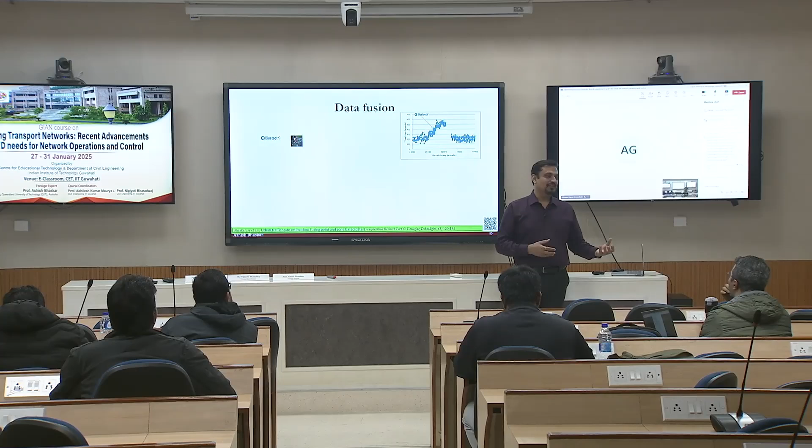So you can easily predict that during these time periods of the year, I have high demand, high volume going between cities. The correlation will be much higher with respect to the type of day, school holidays, public holidays, any function or activities, traffic will be that way. But given the flow value of a specific corridor or the traffic for a specific corridor, and you have a historical database, you can easily make a forecast of what will happen.

But traffic is quite repetitive. Human behavior is quite repetitive in that sense. To a certain extent, you can forecast it. It is expected that this time of the day, this time of the year, I will have high demand because of XYZ activities.

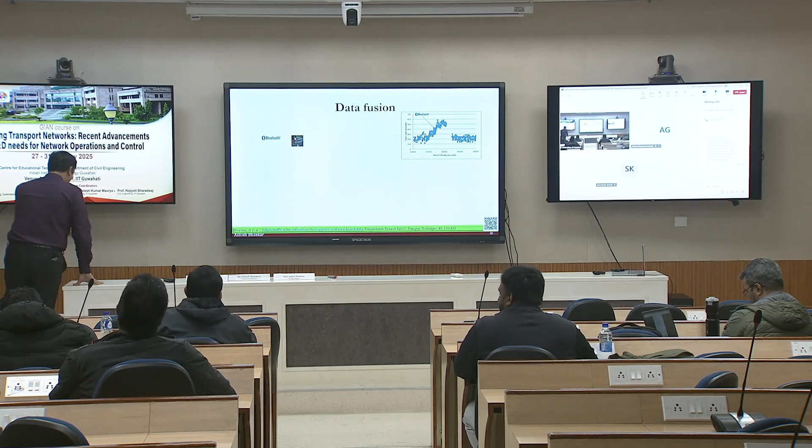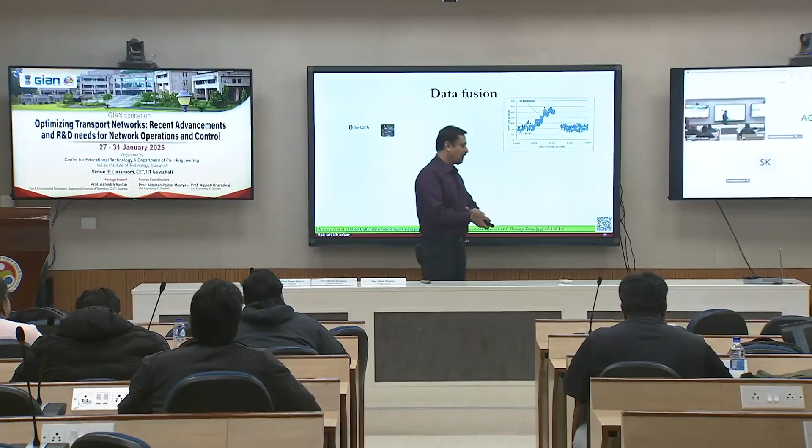In the last lecture, we were talking about Bluetooth loops. We have talked about vehicle trajectories also, and somebody asked a question: if we have data from all these sources, can you fuse them? Can you actually bring them together to have a better understanding?

Like for example, loops—we know that loops can provide us the traffic volume, the flow. Loop is one of the important sources of data which tells you how much traffic is on that road in terms of the number of vehicles.

Bluetooth can give you travel time. It can tell you how much is the travel time from A to B, but from a sample only—it will not tell you how many vehicles were there. It can give you, let's say, a sample from 5%, 10%, but you don't know what that percentage is. But loops are going to give you the volume.

But both of them alone cannot give you density. Loop can give you an estimate of the density quite well on the motorways—given that you have a speed and a flow, you can get a density estimate.

But on the arterials where you have signalized intersections, traffic is quite different. Traffic has to stop at the intersection, queues form, and the traffic is coming from all the sources. The loop is only just one focus, depending on where you have installed it—it can be a stop line, it can be upstream, it can be an advanced detector, anywhere. You only have that information, and you cannot just correlate it straight away to the density.

So we can fuse them together. We can fuse these two sources of information to get some density estimate, and also we can fuse them together to fill the gaps. In fact, we discussed that there are instances when the sample size is not strong enough for you to have confidence in your average travel time estimation from the Bluetooth.

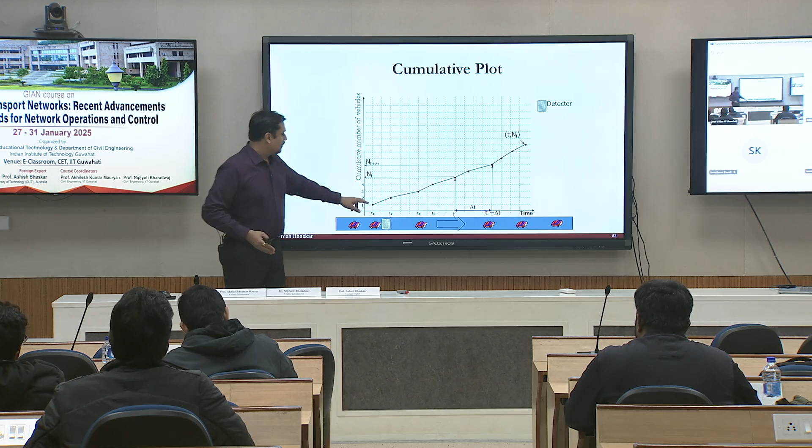So you can get the cumulative plots, right? And you know that loops are counters; they are basically counting the vehicles. You can get the cumulative plot from the loops. Here I've used individual vehicles, like pulse-type information, but what you generally extract from loops is in terms of an aggregation time interval. It might be a 20-second aggregated value or a 1-minute aggregated value. So you might say in 1 minute you have 30 vehicles arrived. So it will go from 1 to 30 in just 1 minute, right?

Now imagine you have loops at two locations, A and B. The traffic is flowing like this, downstream and upstream. At upstream, you can have an upstream counter. We call it the upstream cumulative plot, U(t) as a function. Downstream, you have another cumulative plot. We call it D(t). Imagine that the road was empty in the beginning. Then, at time t, what does this difference tell you? At any given time, what does the vertical distance between the two plots represent?

Sorry? Sorry? But then let's say there's only one lane. So you have a plot here, you have a plot there. Hmm. Yeah.

No, because imagine it like this. Until time t at upstream, this is the number of vehicles you have observed. Let's say this is 500, for example. Then at the same time t, maybe you have observed 400 vehicles at downstream. So what does this gap tell you? Density, or the number of vehicles: because 500 have entered and 400 have left, the gap is 100, so 100 must be somewhere between here and there. It is the number of vehicles between these two locations.

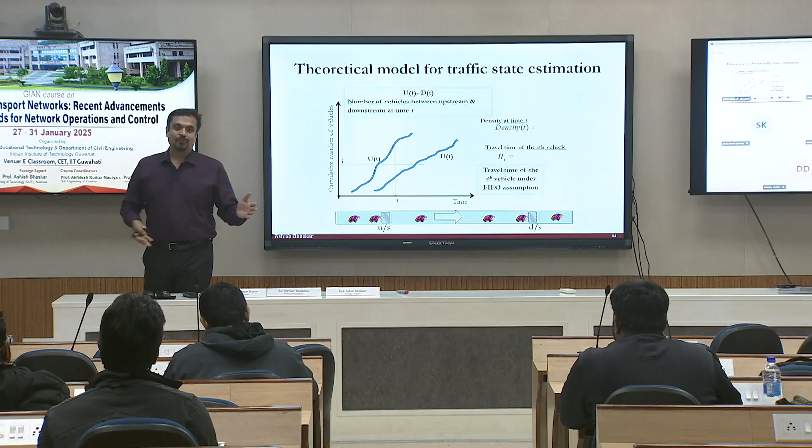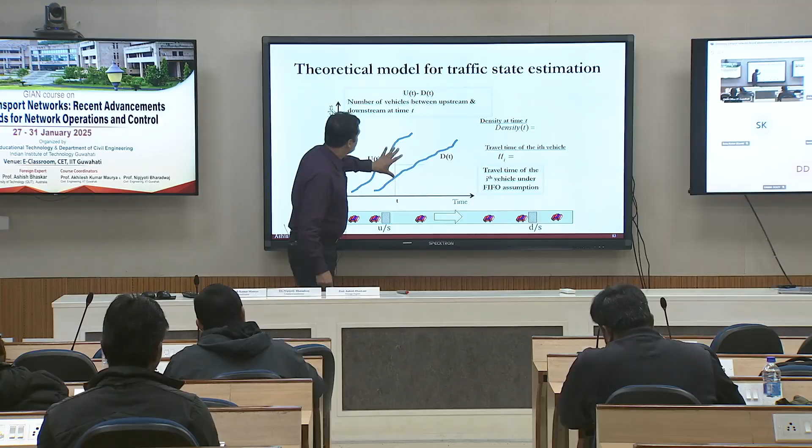So by looking at the cumulative plots, which we also call input-output plots, I can easily get the number of vehicles between the two locations. I can easily get the density and the travel time. Basically, the density will be U(t) minus D(t) divided by the length of the road, right? If I want to write it, density will be U at time t minus D at time t divided by the length of the road, which is that length, right?

And the travel time will be simply the difference between this time and that time. This time will be D inverse of i. This time will be U inverse of i, if that's the function I'm talking about. Travel time will be simply D inverse of i minus U inverse of i, right? So you can know that easily, because I've assumed U as a function. At any time t, you get a counter value U, so I'm taking the inverse function of that.

Now for any given time interval here, imagine this is 5 minutes. Lambda is 5 minutes. So at time t, maybe 2.5 minutes before, 2.5 minutes after. So I'm looking at now a specific time interval. For this time interval, the number of vehicles arrived is that many, right?

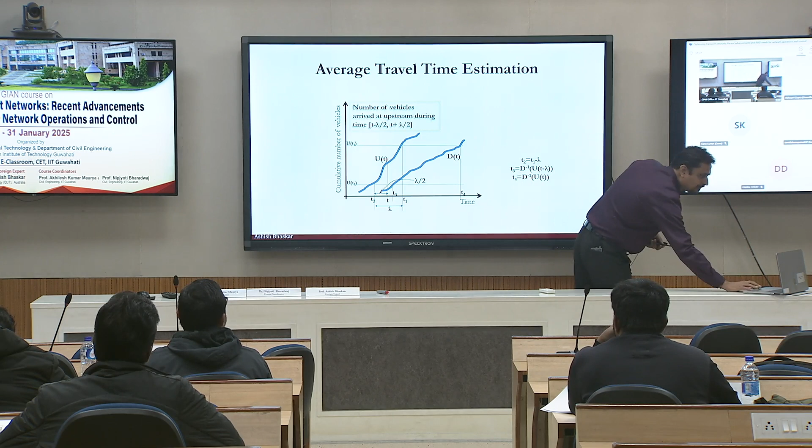Now that's the time interval. So at this time, that many number of vehicles have arrived upstream. Initially, that many number of vehicles have arrived at upstream. So that gap from here to here, the vertical gap, is the number of vehicles which have just arrived at upstream. You're fine with that? All right. Let's keep moving. So that is the number of vehicles which have arrived upstream.

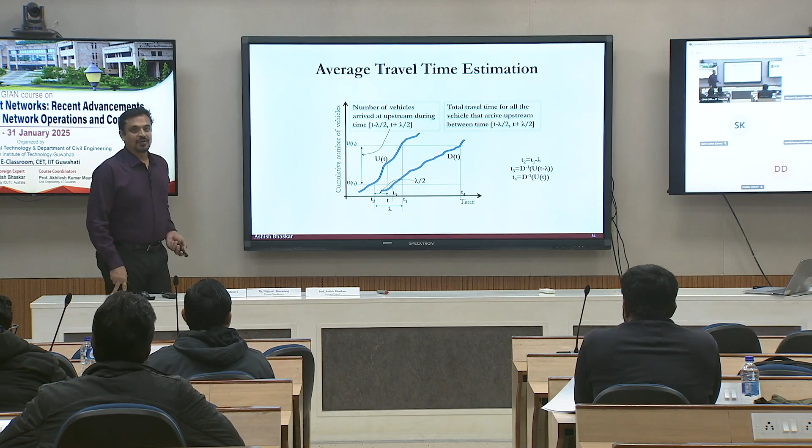Now, what is the total? How will you represent the total travel time for all these vehicles which have arrived upstream? We know the vertical gap was one vehicle travel time. What is the total travel time? All of them. So you start accumulating all of them one by one, right? If you start doing it, it turns out to be that area. That's the way, right? You start accumulating it.

The interesting thing here is, in the previous case I said that was the travel time under first in, first out. Now, generally traffic will never be first in, first out except for the case when you have a single lane. But if you have multiple lanes, there will be overtaking happening. So it can happen that this specific vehicle might have arrived in this order, might have left there. So its travel time might be quite different.

So interesting thing is, let's say a specific vehicle which has arrived here might go at that time. Other vehicle might have arrived here but might have a shorter travel time. So if all the vehicles which have arrived upstream are also departing at downstream within that time interval, if they represent the same vehicles, then that overestimation and underestimation of travel time cancels out, and this area will still represent the average travel time.

Because imagine here, there's one vehicle which has a travel time of maybe 50 seconds, but it is represented here as 40 seconds. And that extra 10 seconds might have been overestimated for the other vehicle. So when you keep on adding all the travel times, the area will still be the same, provided all these vehicles are the same as the ones which have left there, right?

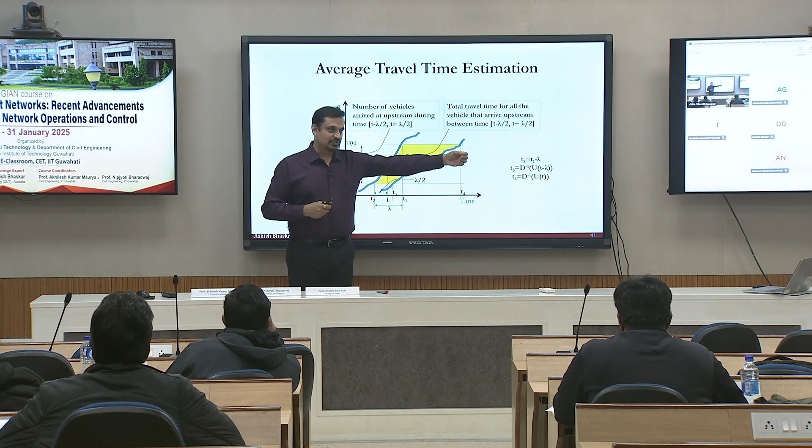But let's say it's like this. Imagine we are 2 people here. I leave first, and it took me 30 seconds to reach there, and I was the first one at the upstream. But then you left, and it took you maybe 20 seconds to reach there. So at downstream, you are the first one to leave. Upstream, I was the first one.

So in the counter, upstream, I am the one, but at the downstream counter, you were the one. But at upstream, you were the second one to come, and at downstream, I was the second one. So your travel time is given to me, and my travel time is given to you. So when you add the two travel times together, it's still the same travel time for us.

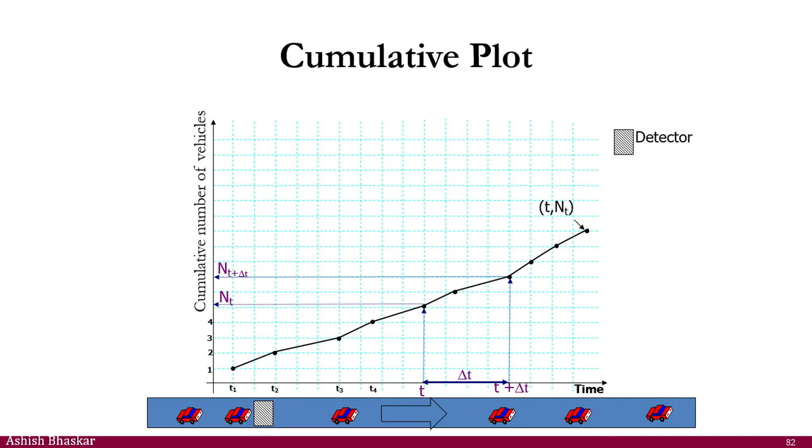It makes sense now? So that's what I'm saying, if the same number of vehicles have left upstream and downstream, then it will balance out. Ultimately, it is giving you travel time based on the counters, but it will have those errors in individual vehicle travel time. That's why when I was talking about this one, I said single lane, first in, first out. So it is exactly the same vehicle. But if there are two lanes, there will be overtaking happening.

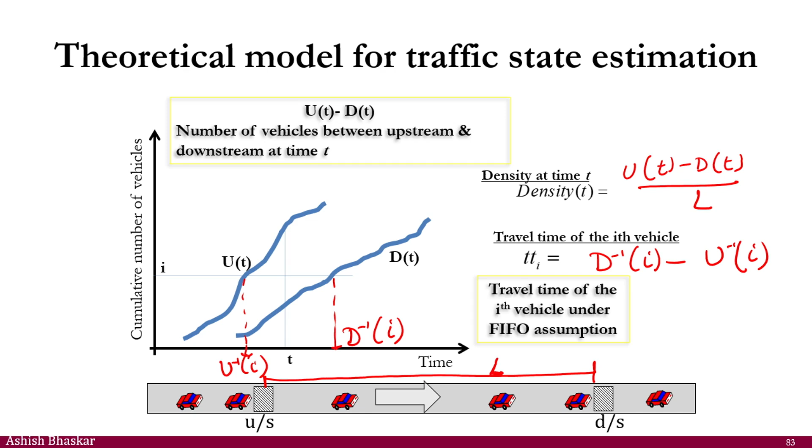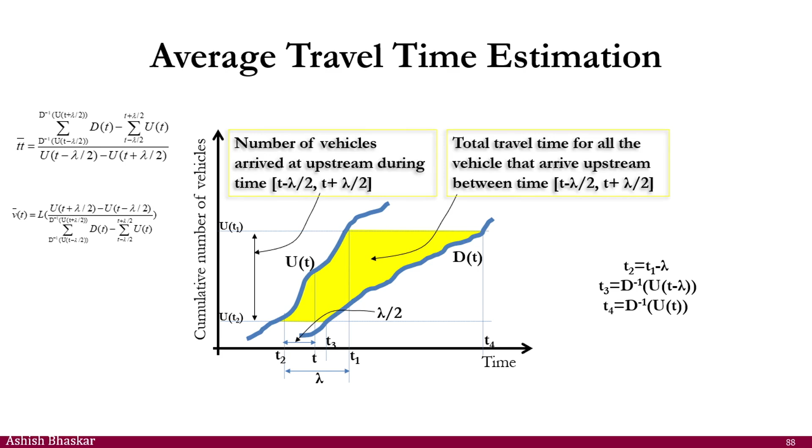So that's a good thing. Average travel time can be estimated easily by the cumulative plots. This is just expressing the same thing in equation form. You know the travel time, you know the length, you know the average speed also, right? Which is the total distance traveled over total time taken. That's not a big thing. Don't worry about these equations. This is simply what I said. They're just writing it that way. It just sounds scary when you write it in these functional forms.

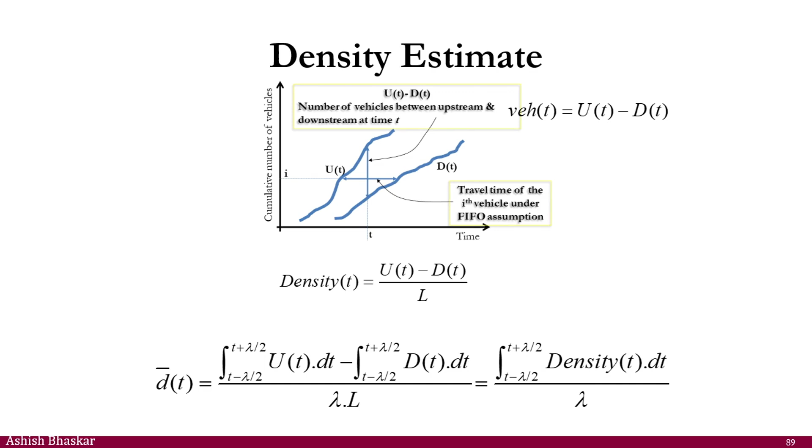Now, the vertical distance we said was the density, right? Or the number of vehicles from upstream to downstream divided by the length is the density. If I look here, what is the total density in this region? So over the time interval delta, or lambda, sorry, it should be again summing all the vertical ones. So that area should be the total density in that time period. So an average density should be, you just divide that by the time interval. That is an average estimate of density in that time interval.

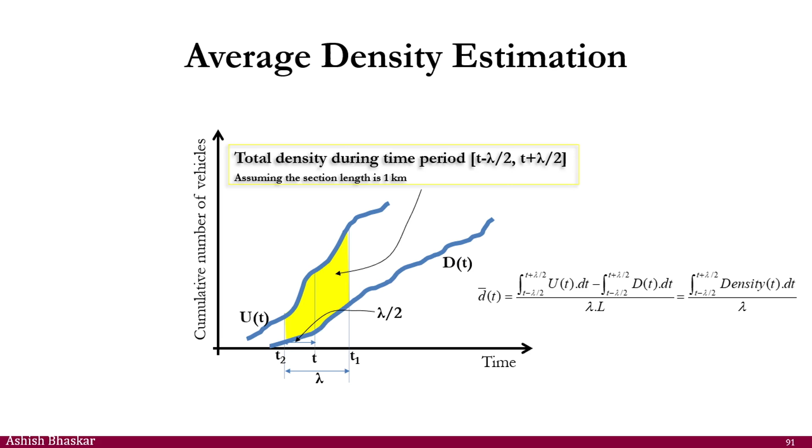Which is in this particular case, because you have an upstream curve and a downstream curve, if you subtract these two curves, just take an integral from T1 to T2, you will get that. In the previous case, it was the horizontal area, so you can't take an integral. Here it is the vertical area, you can take the integral. Are you fine with this? So technically, if you have loops at point A and point B, you can get these things quite easily. But the real world is not that beautiful.

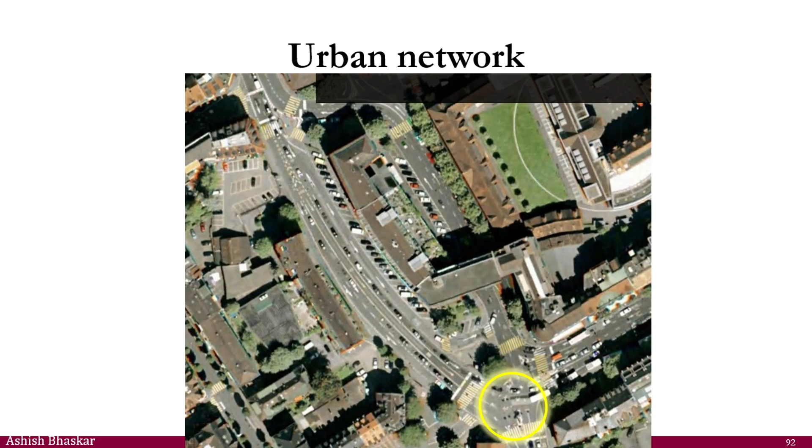Let's have a look. It's a simple intersection along one of the roads. Intersection here. At this intersection you have a stop-and-go running condition. Vehicles stop during the red time, then flush during the green time, right? And if I give you an aggregation value of, let's say, every 1 minute, you cannot assume that the cumulative plot will have a straight line in that 1 minute. It should have some shape.

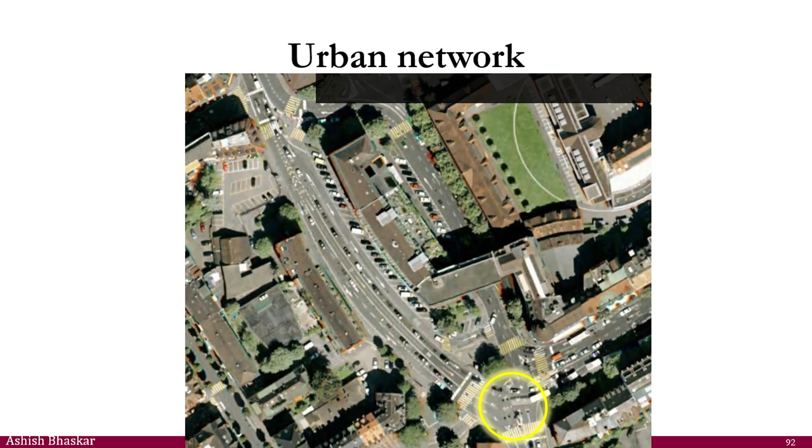Another important thing here is, you have an entry flow. This is, let's say, your study link for which you want to estimate the density. You have different types of exits happening. But more important is, you might have some parking on the road. You might have some sink also happening. So you might have entry and exit, so flow is not conserved. In the initial example, I showed the flow is conserved. And you have different turning movements also, which contribute to different density values or different queue lengths. And another important thing which we should never ever forget: the detector has its own counting error. Plus or minus 5% counting error is easy to get. So if you just keep on accumulating with the detectors, the errors will have an impact.

Just to give you a simple example, you have upstream, downstream, there is a side street, and traffic is always leaving through the side street in the middle. We call this a mid-link sink. So you observe 300 upstream, but only 270 have left downstream because 30 have been lost. So in this particular case, if you just continue drawing your cumulative plots at upstream and downstream, after a while they have drifted. We call this a drifting issue. They just keep on drifting. On the other hand, if you have an addition in between, they will just cross each other, which is totally not going to make sense: that you have fewer arrivals and more departures.

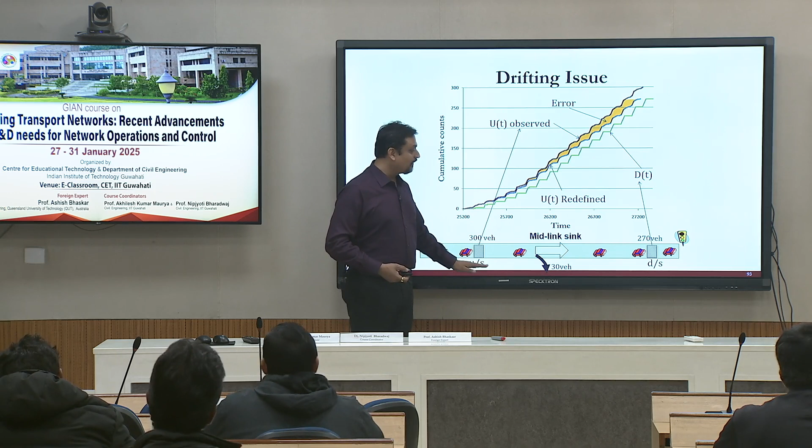So, something at the entry point and the exit point. Yeah. Then with 3 or 4, you accumulate them. They should be on different lanes, right? So if I have 2 lanes, I should have 2 loops there, one for each lane, and you have to accumulate them together, because what you want is how many. So think of them as counters, counting the number of vehicles moving there. We are only considering the counting here.

Yeah, if you place something in between, that's good for you. But that is going to cost us. Ideally, in this particular case, you can put a counter wherever there's an entry and exit. That's what you should be doing. Then you will have more confidence and you can actually use it. But you never have that.

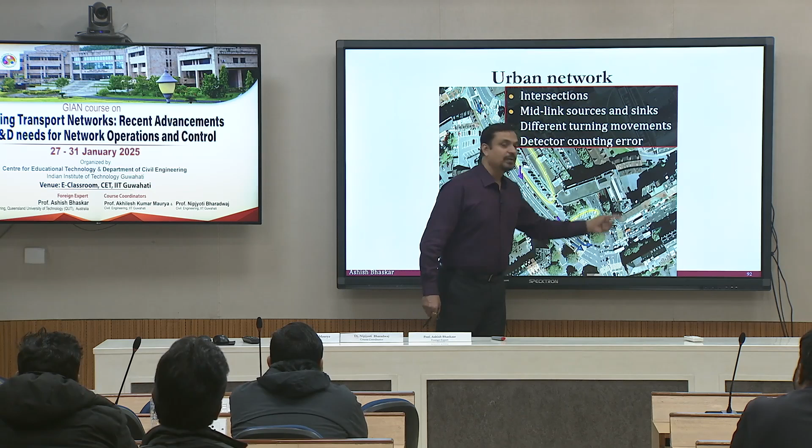In fact, we have seen that for traffic signals, the loops can be at the stop line. So you have a stop line here, you can have a stop line loop there, and you know what proportion of traffic might be coming under certain assumptions of turning proportions, because every intersection will have stop line loops. The stop line here is an upstream for the downstream one. But you have to consider the turning proportions: some traffic might be turning left, so you have to take them off before you assign how many are going downstream.

A lot of it will depend on what is there, right? For example, what happens if something blocks this road? Go left around. Yeah, that's fine. They can open it in the later part. So you should know those operational constraints. That should be known to you.

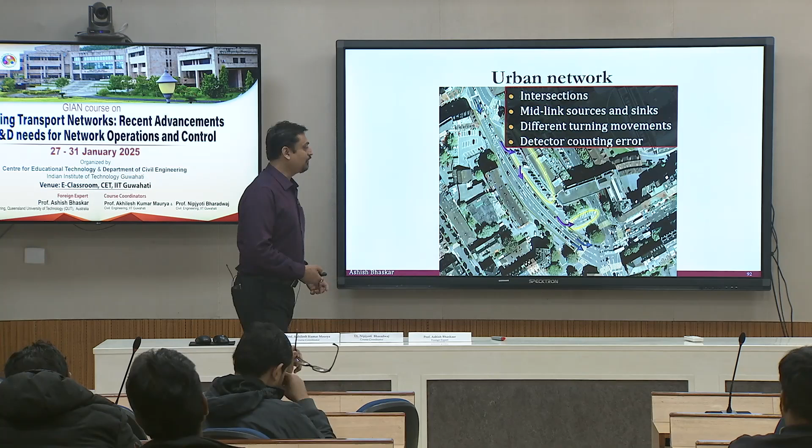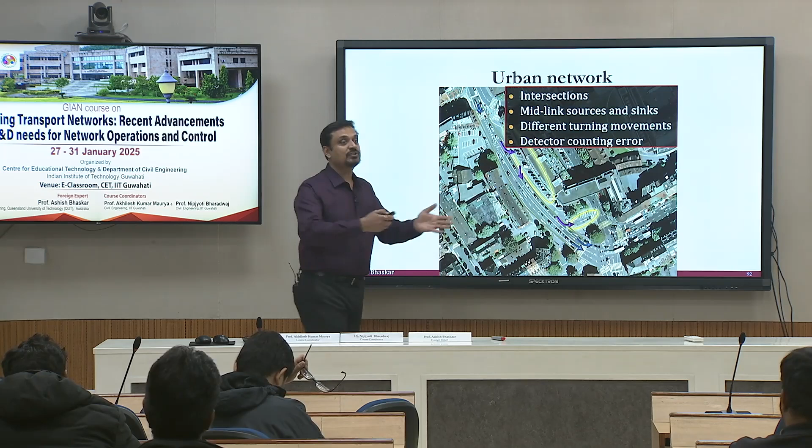For example, during the morning peak period no left turn is allowed, and also during the evening peak period, but during normal time it is allowed. That's fine. But you should know those constraints for the time interval we are talking about. Those are the initial knowledge you should have about the system. So let's have a look now.

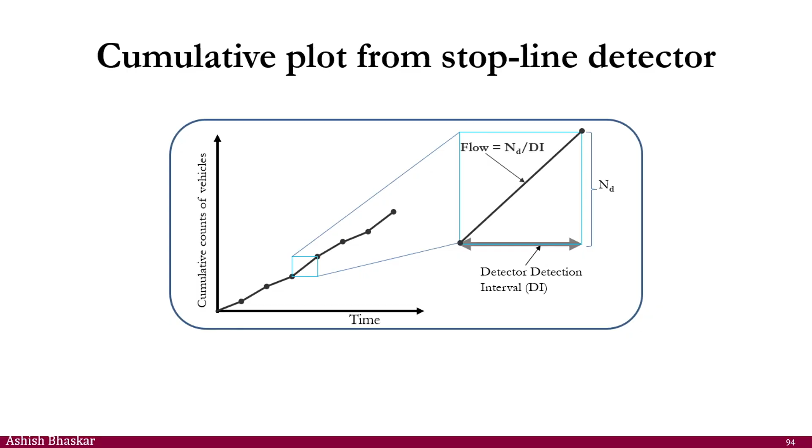The other thing I mentioned earlier is that the detector is going to give you an aggregate value for, let's say, 1 minute or 2 minutes for that specific intersection or loop, and you are assuming a uniform arrival. If you want a better shape of this cumulative plot, you need to have the signal timings, the red time and green time. During the red time, there should not be any flow. Only during the green time should you have flow.

So if you know the signal red and green times, you can modify this uniform detection cumulative plot for that detection interval into a shape where only green gets flow and red gets no flow. This is very important because at this point there is no flow. And if the signal is undersaturated, the last vehicle exiting on the green, with no queue left over at the end, should have the free flow travel time.

So it is giving you additional information: the horizontal gap between the loops at that time should be close to free flow travel time. So you are getting more hook points to adjust the cumulative plots. I call them virtual probes, only under the undersaturated condition. For example, here flow should be 0, and you know the proportion of the green. This is the detection interval. Let's say in 1 minute you have observed 50 vehicles. So ND is 50 here, for example.

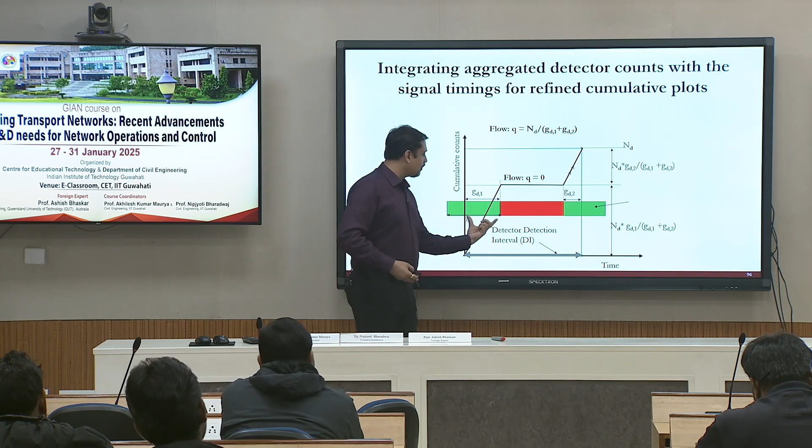So I will say out of these 60 seconds, maybe 30 seconds was no flow. So for these 30 seconds, whenever I am drawing, I should not have any flow. There should not be any increment. The balance, I will do the increment, and that increment I will increase based on what proportion of the green is there. Maybe 80% of my green is here, 20% is there. So 80% increment I will do here, 20% increment there, that's all.

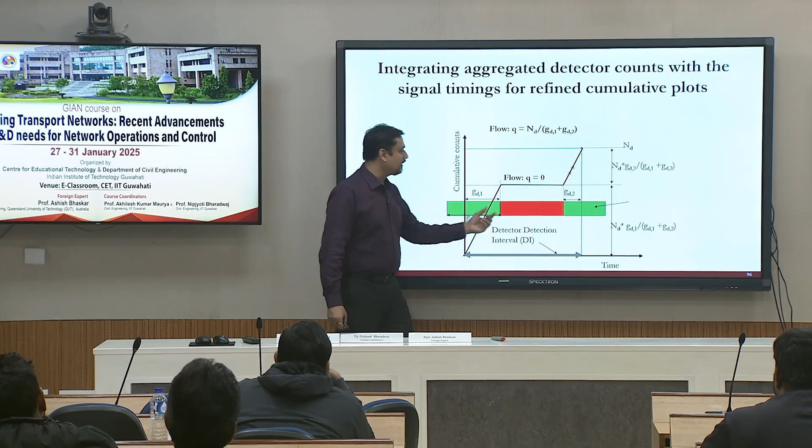Generally, if you have 5 minutes and you have signal timings, you just keep on doing that way, under the assumption that your arrivals are uniform. The shape should take into account the kind of flow. Technically, it still has some errors. If you are approaching the end of the green, you might have a different flow rate compared to the start of the green, right? But you don't want to go to that much complexity. I'm just trying to simplify that process.

So the concept here is very simple. You have upstream and downstream plots, and you know that because of the error in the data set, the drifting issue, these plots don't have good applicability alone. So you have a probe data set. Probe means Bluetooth travel time or some travel time value. A vehicle was at time T1 at upstream and T2 at downstream. So you have tU and tD as two vectors for individual vehicles. Each element is one vehicle.

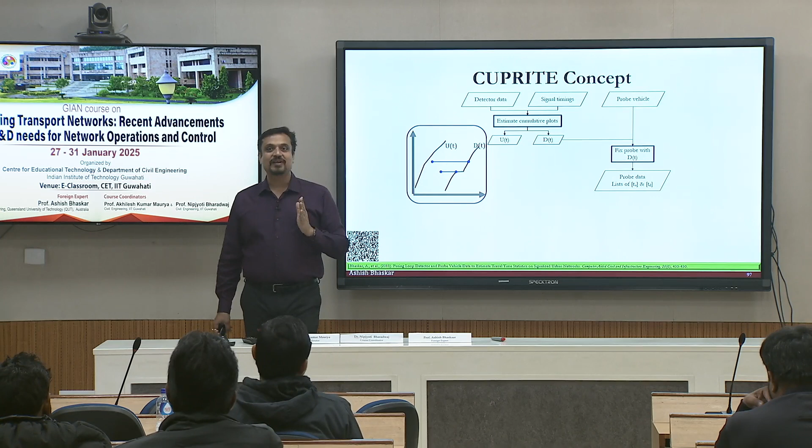So your upstream should pass through these, but because of the non-first-in-first-out issue, if you just try to pass through them, you will have a zigzag. And a cumulative plot should always be increasing with respect to time. It should not go back. For example, ideally this one should be here and this one should be there, right? So the travel time for this one should be that much. Travel time for, I should draw it here, yeah.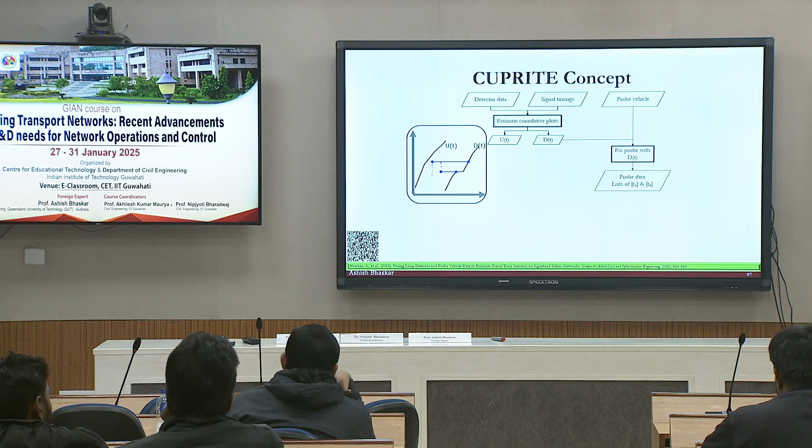So this is an example which should tell you why there was an error. If I look at the counter, the second person was first observed upstream but second observed downstream. The first person was second observed upstream, but he might be driving fast, and was first observed downstream, right? So if I had drawn the cumulative plot for these, it should have been something like this. That's the first one, that's the second one, and this should have been the cumulative plot for the downstream one. The second downstream would have been a cumulative plot like that, if I just use that one, right?

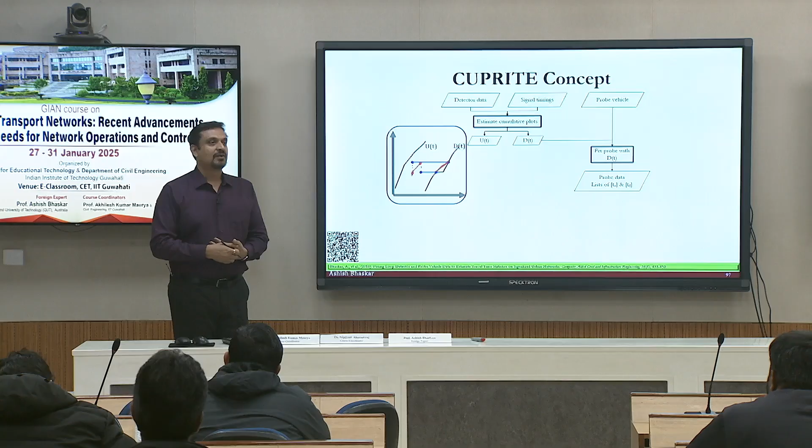You can see for this one, I'm making some error in my travel time. I'm underestimating here, and overestimating here. Because these two vehicles are the same at upstream and downstream, they balance each other out. If I sum this travel time and that travel time, it is the same as the actual travel time they would have taken. So now I hope you understand that even without first-in-first-out, if you're taking the area, they should balance each other out, as long as the vehicles at upstream are the same as downstream.

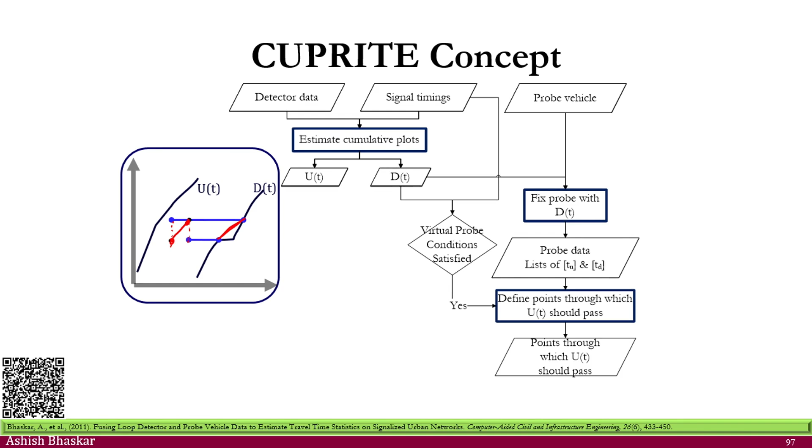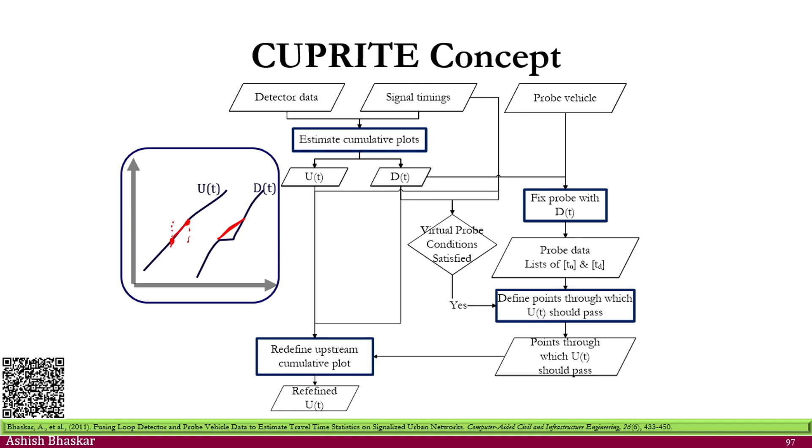So now, the virtual probes I was talking about were at the end of the green time. But let's say if I know those points, I can readjust my cumulative plot so that it passes through those points. I need an algorithm to do that. Once you have it, you have a redefined cumulative plot, and you can use it for travel time and density estimation.

So this was the whole overall concept. Let's see how we redefine it. What algorithm, how do we make sure this is how it passes?

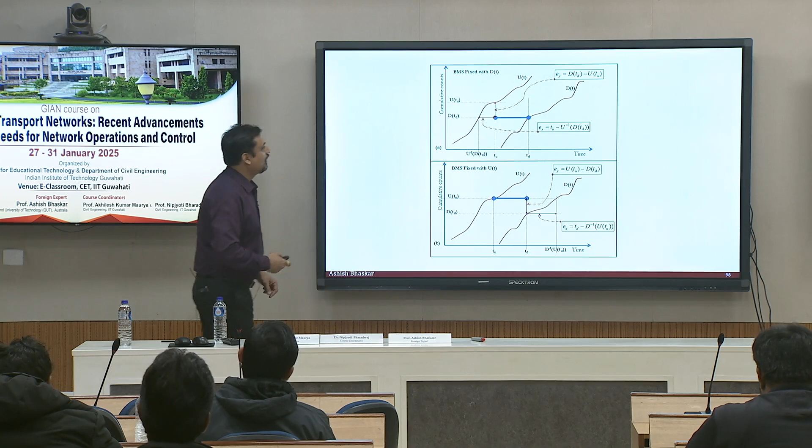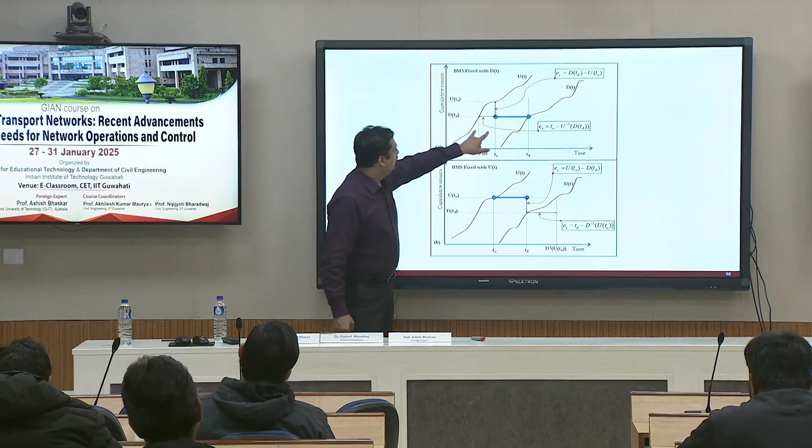So the concept here is you can fix it to downstream, or you can fix it to upstream, depending on your confidence in the estimate of the cumulative plot, or the application. You want to minimize the errors which are there.

So let's say I'm fixing it to downstream. That's my downstream cumulative plot. I have fixed all my probes there. Obviously, in this space, I know that my redefined cumulative plot should pass through these hook points. So if it passes through these, then any underestimation is compensated by overestimation, and underestimation compensated by overestimation, and that's how you can balance out things.

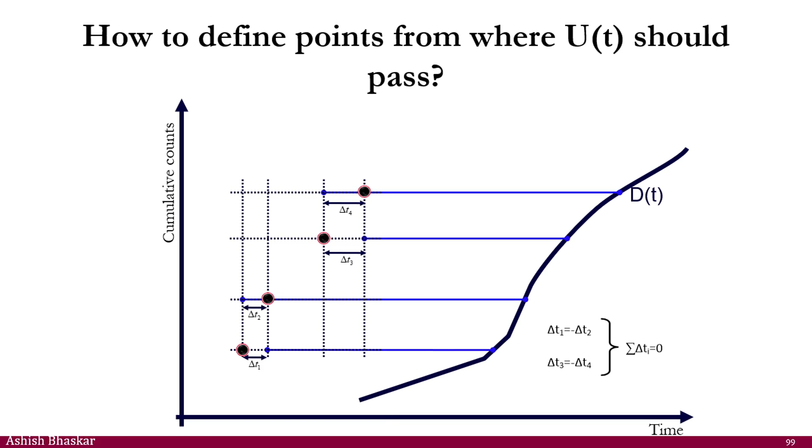You can see this quite easily how it looks like. When you plot it and draw the lines, the diagonal is the one you're interested in. So I came up with a very simple algorithm for it, which is: you have the list of your upstream and downstream data points.

So this is time upstream for the first one, time upstream for the second one, time upstream for the fourth one, time upstream for the third one. You have the list of your upstream data points. Similarly, you have a list of your downstream data points. You have a list like this.

What you can do is sort your upstream in order of time, and sort downstream as well. So you sort upstream independent of downstream, two separate lists independent of each other, and then you merge them together. The points you get here will be your points to pass through, naturally the diagonal points. That's the algorithm, very simple one.

So T upstream 4 is now merged with T downstream 3 as your probe, and you naturally get those dot points. Now you want to write code to do it, you don't want to do it manually every time. So this is how you can do it.

Just get your list of upstream, list of downstream, sort them, and it will come out that way. Once you have this, I can readjust my cumulative plots. So I might have a reference point. I have already identified my points to pass. What are the points to pass? This is the cumulative plot I have. So what can I do now?

What should I do so that this plot passes here? So you have a hook point earlier, where you have confidence. You want this plot to pass from here. What can you do?

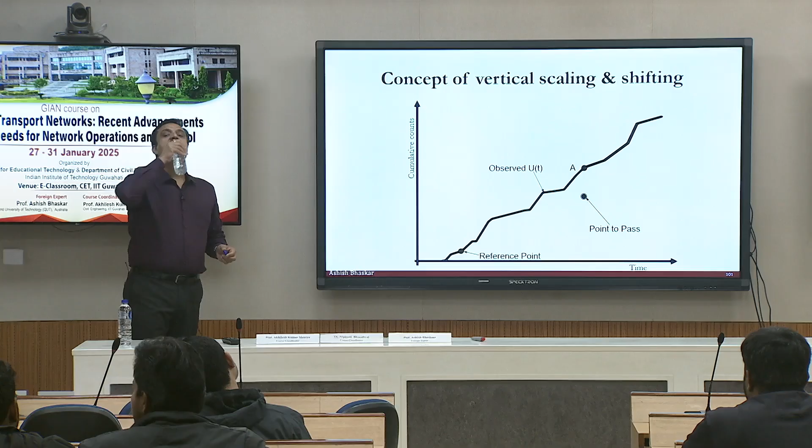Shifting means you shift it like this. If I shift it like this, I am basically missing out, I will also be screwing up my initial hook. It has to be hooked here.

Sorry, adjust other data points. Is it possible at that point? You make the optimization on the count. So you're saying just bring it like this. You're here, just bring it like this. But if you bring it like this, the thing will also go that way, right?

So you can bring overall like this, because that is the only reference point you have. After this you do not know, that's the only point you need. So you combine the two together. You say from here to there, I will do the vertical scaling. So I know this is at one point. I will scale it up or scale it down depending on how I scale it. In this case, we are scaling down, bringing it to that part.

Then the other part is vertical shifting, you just bring it down as it is. Because that cumulative one you have generated, you do not know whether there was an error or not. Here, until this point only, you know that, right? So you do the vertical scaling and the vertical shifting. Once you get a new point to pass, then your previous point to pass should become your reference point, and you do the same thing again, vertical shifting and scaling. And you keep on moving like that.

No, the cumulative plot is still continuous, right? It's still continuous, it's not changing. In between this, we do not have any knowledge, so we can't do anything in between. The only knowledge we have is at those reference points, right? Yes, if this is after 15 minutes, any error in the 15 minutes, we had no information in the past. So whatever shape we have observed, when we had done the scaling, we have brought it down to the point where we have the confidence.

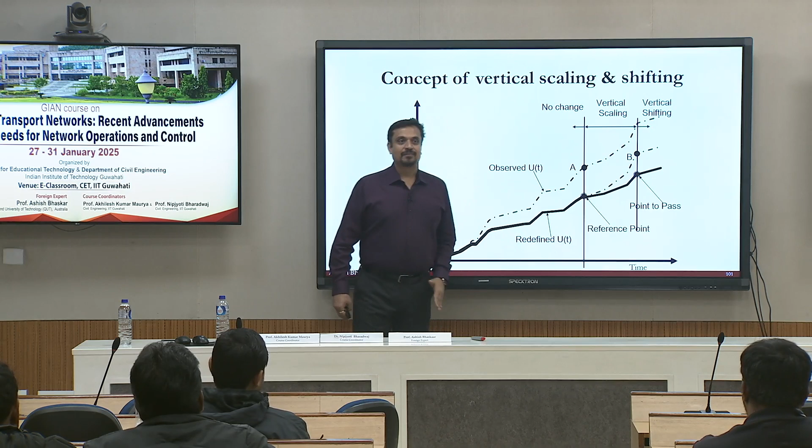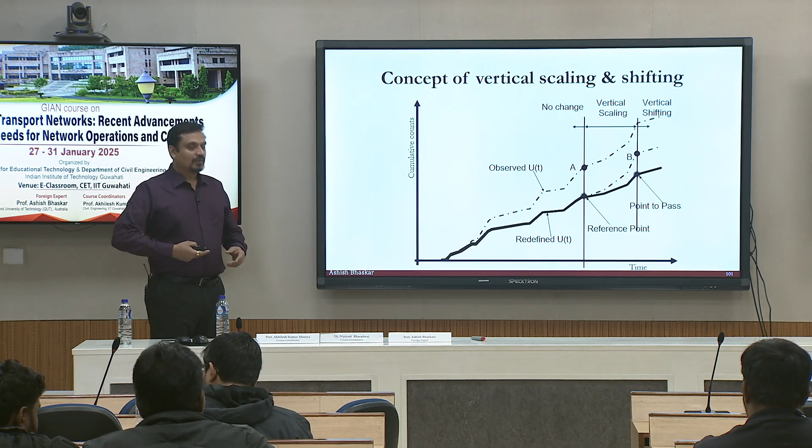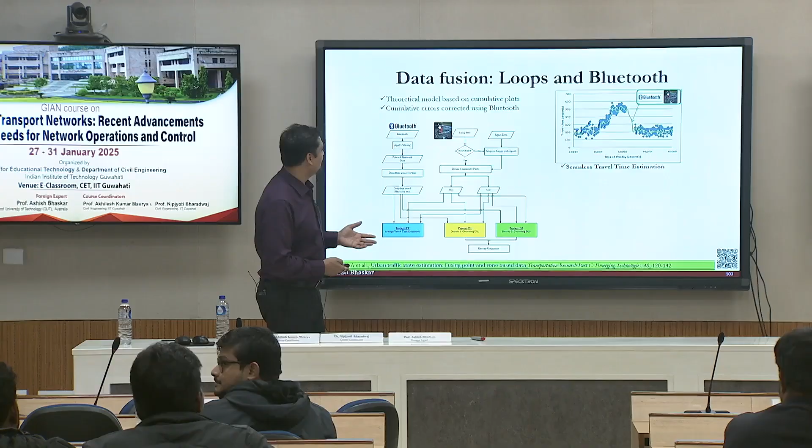The reference point is already our Bluetooth, that's why the Bluetooth is right. And by doing adjustment we have reduced the error. Now with this new curve, what do we want to do? We want to get the travel time and density. So this is what we are doing. I mean basically, when I was talking about the cumulative plot in the beginning, at the end of the day, this is

what you will do. Once you have upstream and downstream, you can use that to estimate density, or you can use it to estimate average travel time. But only when you have confidence in these two. So what I'm doing is, I said look, you don't have enough confidence because of all these errors, right? They might be drifting away.

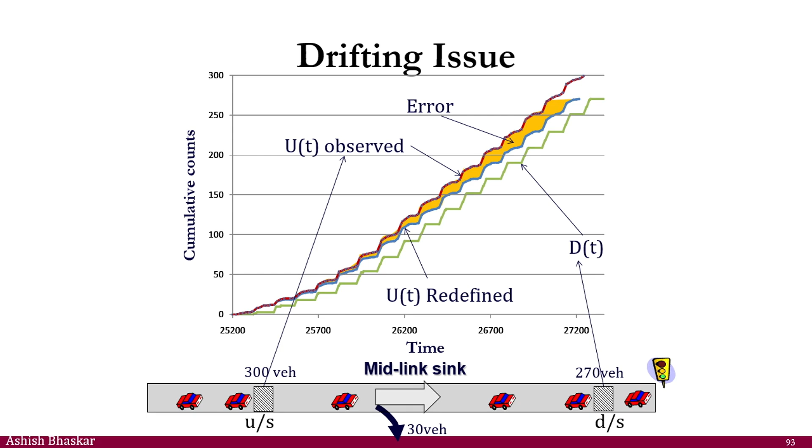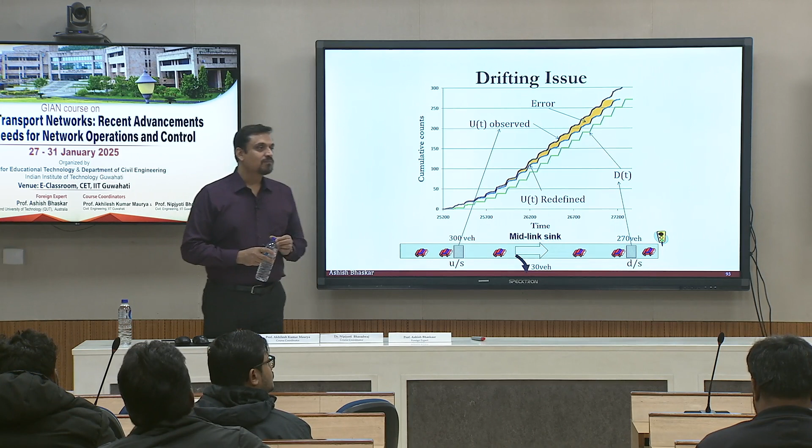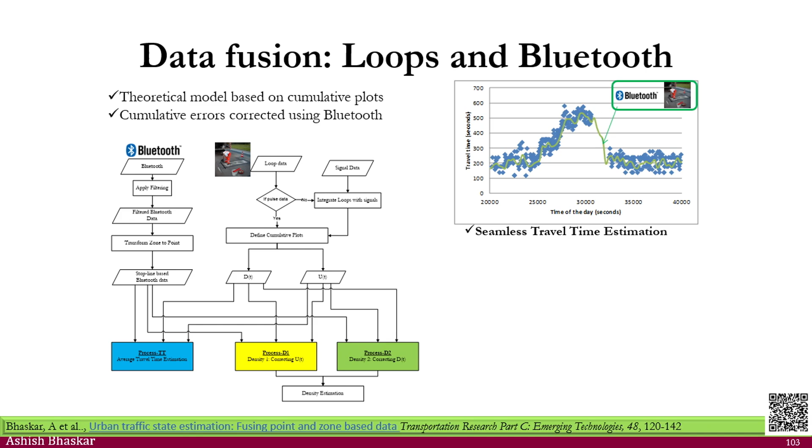Yes, let's have a look at that. So obviously, once we have done this work, we wanted to do some validation. Let's go for this validation. So what we did was, we know the Bluetooth travel time, we intentionally took some data out, right? And now I do not know the travel time at this point, I want to estimate the travel time. So we actually did that.

This is around the Coronation Drive. I had good Bluetooth travel time information. I was taking my Bluetooth data points out, as you can see here, and all those things. And we try to fill that gap by the integration of the Bluetooth you had from the other points and the cumulative plots. So this portion, you do not have any Bluetooth, you had it before, you had it after. So you use that before-after Bluetooth points and the loops for the whole time period to fill the gap. And this is what you got.

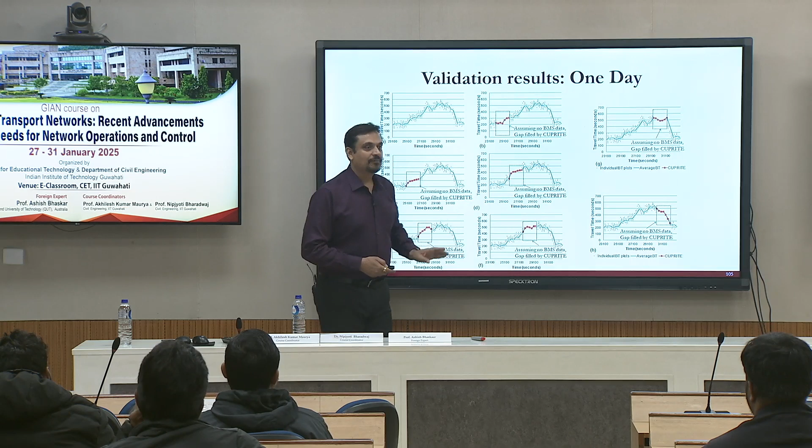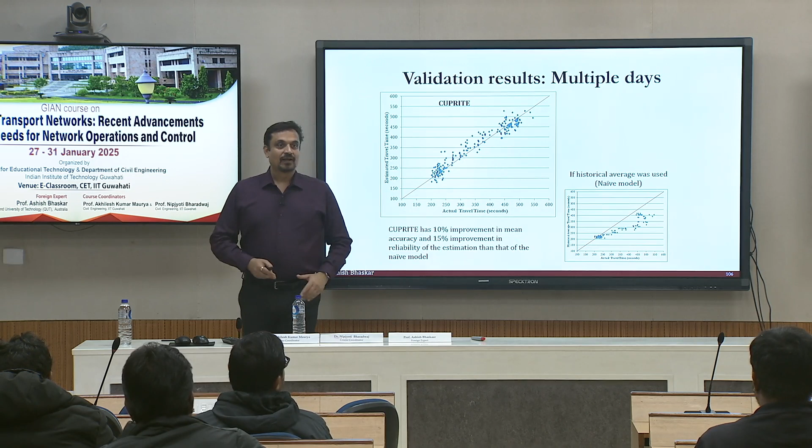So this is your travel time from the Bluetooth, assuming that was perfect in the beginning. This is the travel time that you estimate from Cuprite for the time periods when you assume there was no Bluetooth, and it shows some good correlation. So for travel time you can do that, right? It's around 10% improvement. Cuprite has 10% in the mean accuracy, 15% improvement in the... these are the values, don't worry about it. It shows some good result, right? It can be 10%, 15%, 20%, some value will be there.

But when it comes to density, we do not know the real value of the density on the network, so I cannot do any validation from the real data set. So for this, I had to rely on simulation. I went back to the previous simulation tool we have developed for integrating Bluetooth with the traffic simulation tool.

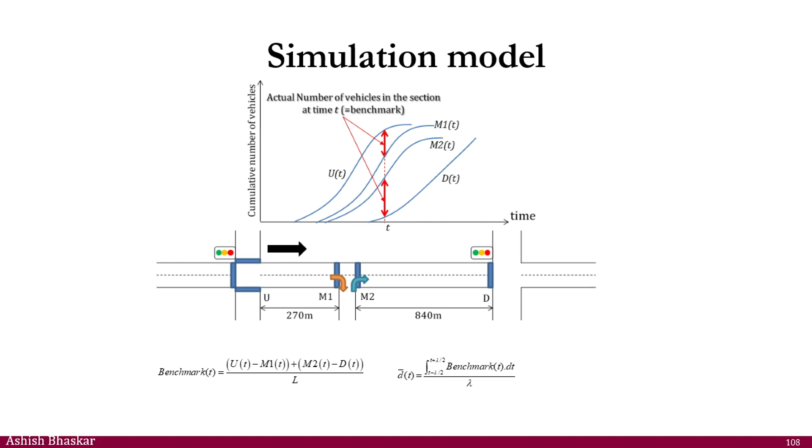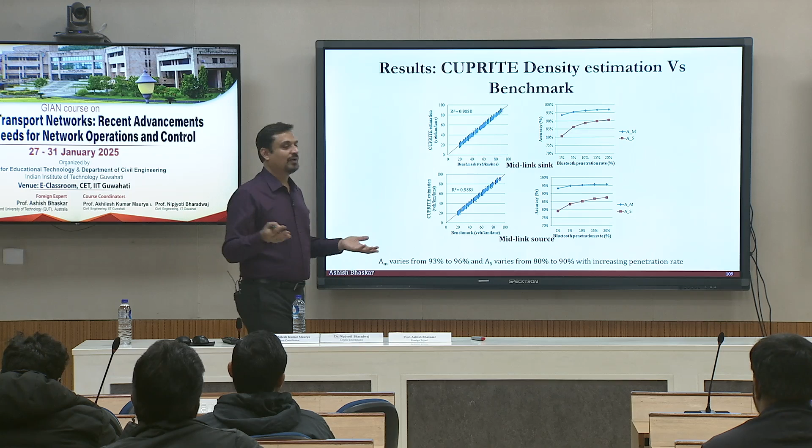We perform a simulation along the corridor, our own corridor, so in simulation you can know everything that's happening. You put the loops wherever you want, do some manipulation in terms of defining the density along the corridor based on your input-output, and benchmark the density from your simulation with the one from applying the algorithm. It shows some good estimates. The results can be 90% accurate, 85% accurate, depending on the scenarios selected, but what's important is this concept is working quite fine, giving a good estimate. Even if less than 90% accurate, we are happy with that.

For example, this is based on the Bluetooth penetration rate, the percentage of Bluetooth you're selecting from your traffic. At 1%, you get a mean accuracy of maybe 92%. A5 means the 5th percentile of accuracy, meaning 95% of the time your accuracy was at least 80%. This tells you how much reliability you have in your system. I could have a mean accuracy of 80%, but that could lie between 60% to 98% - the reliability is very bad. But if I have a mean accuracy of 80% and it varies between 78 to 82, the reliability is good. That's what you're looking at here.

This is when you're considering the mid-link sink and mid-link source, meaning somebody is entering or leaving, so you consider two different scenarios. At the end of the day, as the penetration rate increases, more information you have from the travel time hook points, more accuracy you get. So your question - if I only have one hook point, one reference point, what can you say in between? If you have 1%, the reference points are far apart, so your errors are still higher. If you have 20%, you have closer reference points, more accuracy. So naturally, as penetration rate increases, you'll have more confidence in your estimation.

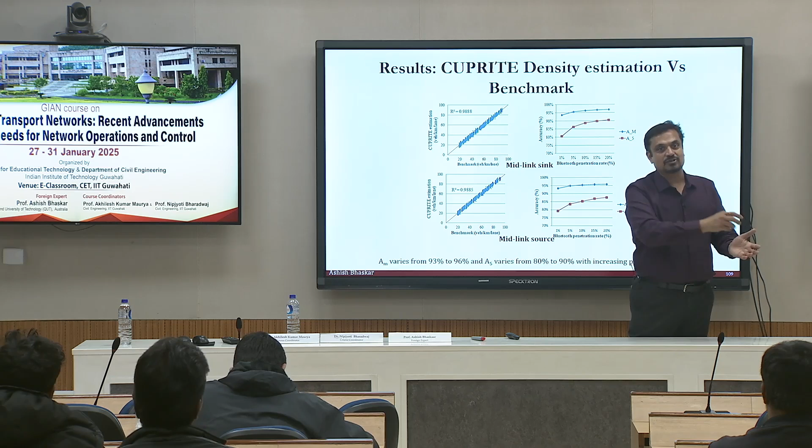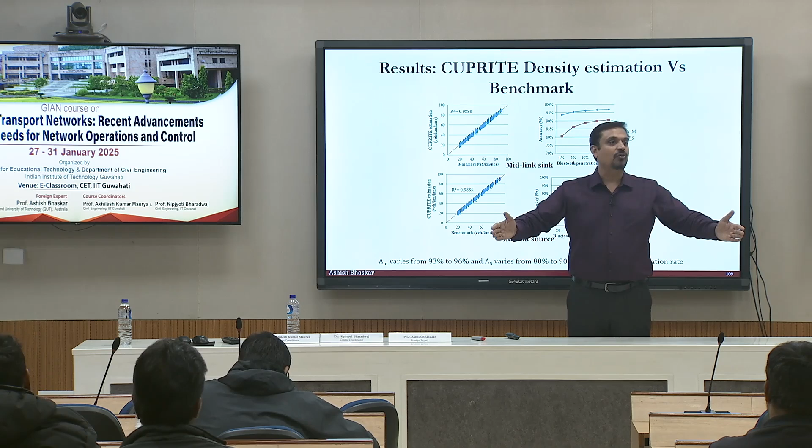But when you're on the arterials, at the loop location, because of the stop and go condition, traffic stops, queue builds up, your equation is not straightforward in giving you the density for the entire corridor. That equation works under stationary conditions, meaning traffic is consistent over that stretch, which is fine on expressways. The equation will fail - or not fail exactly, but will not give you a good estimate of density for a larger corridor - when close to a congested region. You are assuming that flow and speed at one point is homogeneous over the corridor, but on arterials homogeneity is not there. Near the intersection is where you have all the queue building up; upstream you do not have enough queue, the density is low, downstream is high. So homogeneity is not well respected there, and you cannot just say Q equals K times V to estimate density for the entire stretch.

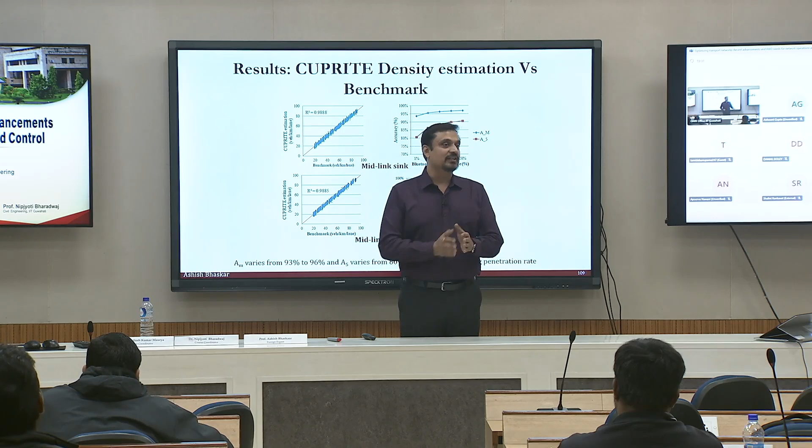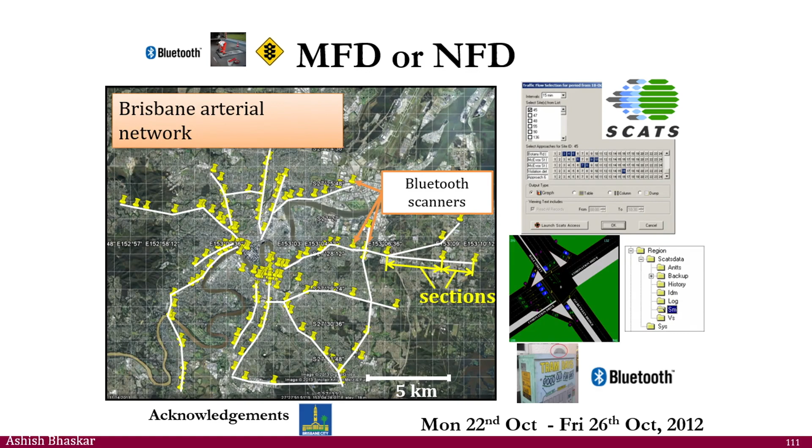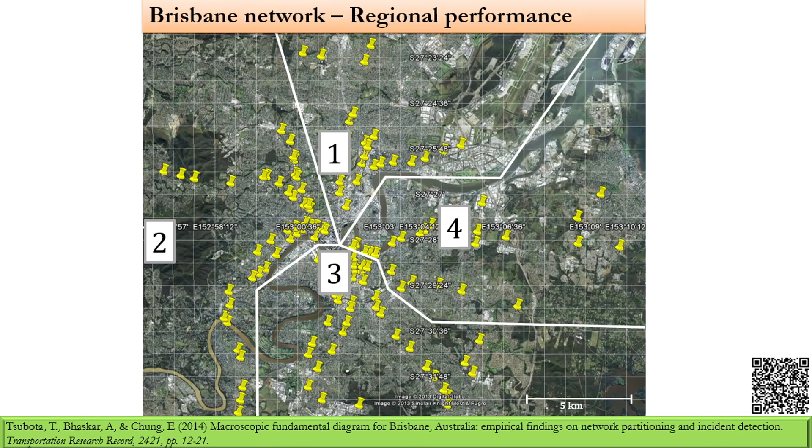There are errors, but this is the best we can get out of it. That's one of the applications that we discussed. Another application where you can apply this, I mean, input-output can be applied anywhere. There's nothing wrong. What you do is amount coming in, amount going out, make a reference point, and keep on adjusting them whenever you have some information.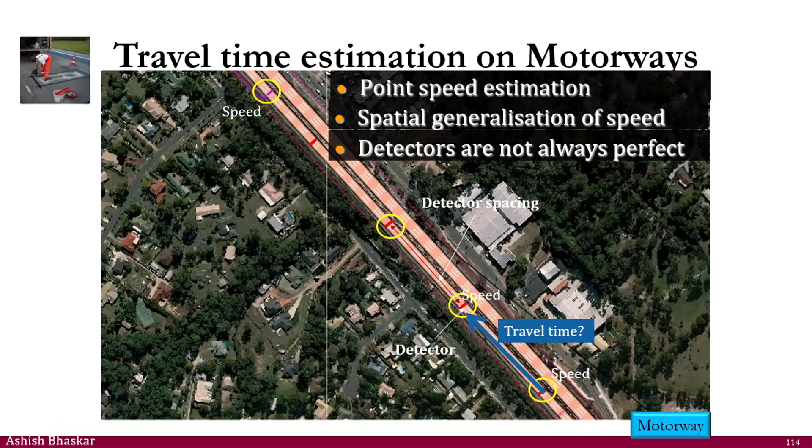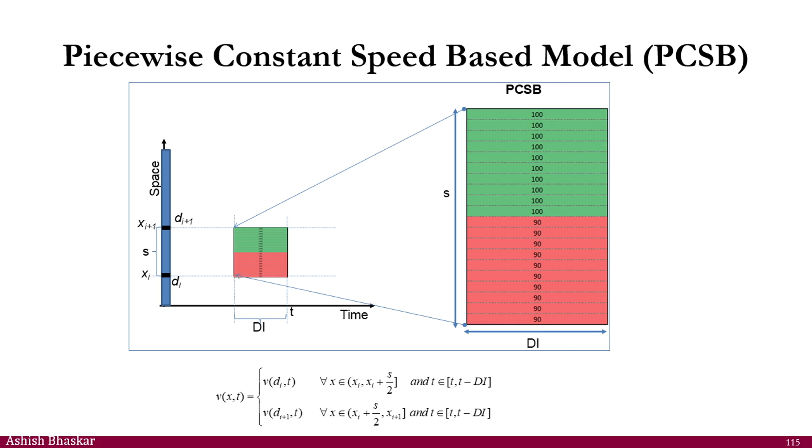So we have discussed that when the spacings are small, you can estimate this on the motorways. You want to estimate the travel time. If you have a loop at one location and a loop at the other location, you apply a piecewise constant speed based model, assuming whatever speed you are getting from location 1 is constant for half of the distance to the other loop. But as the spacing starts increasing, you will have more and more errors. We showed that yesterday when I discussed this model.

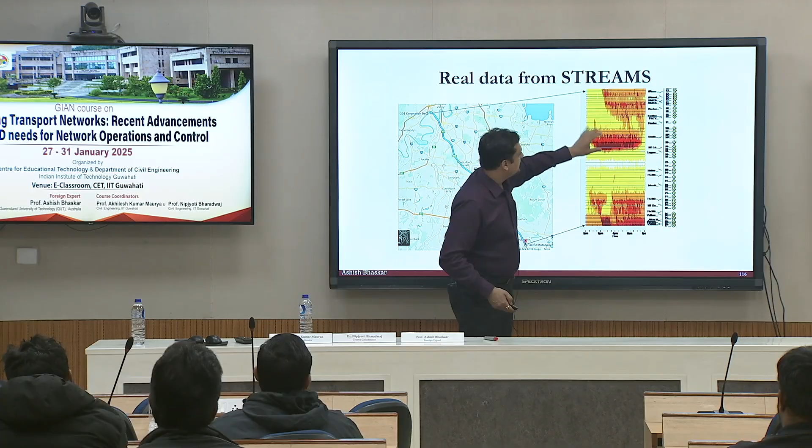For example, in this case, this is a Pacific Motorway. You apply that model. There are instances when the spacings are large and you might have some errors, and you want to generate this kind of heat map. So one way to do this is when the spacing is large, let's say maybe 2 kilometers apart loops, and there are on ramps and off ramps in between, so there are sources and sinks in the middle. You can still apply this with certain adjustments.

For example, if you apply a piecewise constant speed based model from upstream to downstream, you might get a travel time as shown here. But this travel time might have its own errors based on the spacing. So we said that we can think of a treatment period, in which I would like to adjust my travel time, and I need some hook points in the cumulative plots. From this loop and that loop, I can get my cumulative plots, but we know there is traffic coming in and going out, so I need to adjust that. So what hook points can you think of here?

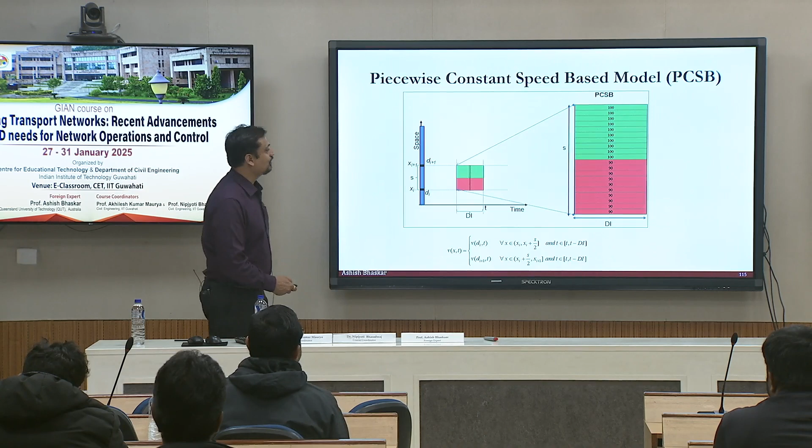Oh, it will generally increase and it will go down, because as the congestion increases, the travel time will go up and go down. When the system is not congested, you will have a free flow travel time. You don't have to worry about anything there. Even if the loops are apart, you are fine. It is only when the system is congested that you have issues. For example, this portion is free flow, don't worry about it much. This time period is where you are interested. So what can be the potential hook points?

But I have a loop here, a loop there. No, but I have no information on who's entering and exiting. I only know that from here to there, the travel time profile is like this, based on the piecewise constant speed based model. The y-axis is travel time, the x-axis is time. At a certain time, the travel time is free flow, a very low value. Then travel time starts increasing, then starts decreasing, and goes back to free flow.

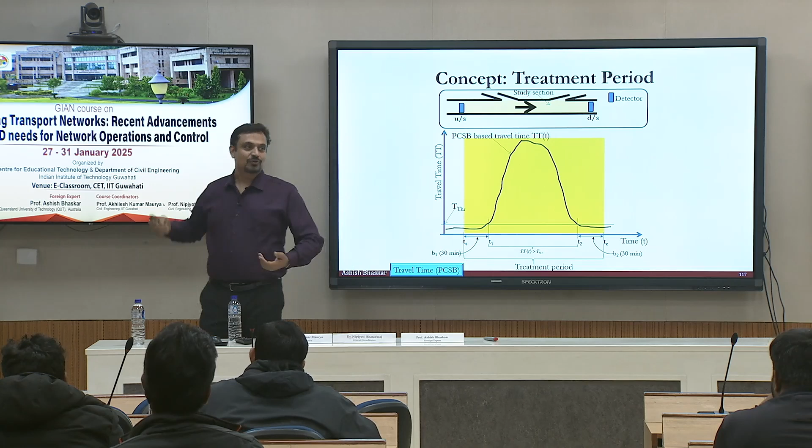Yes. So free flow is definitely your hook point, right? Because that's the time you know the travel time should be close to free flow. You can have an additional hook point, which is the peak value. When the queue extends and congestion comes, your piecewise constant speed based model is going to give you good results, because the whole system is congested. You might have a speed of 20 here, 20 there, or maybe 20 here, 30 there. The average is fine. So I have 3 hook points here.

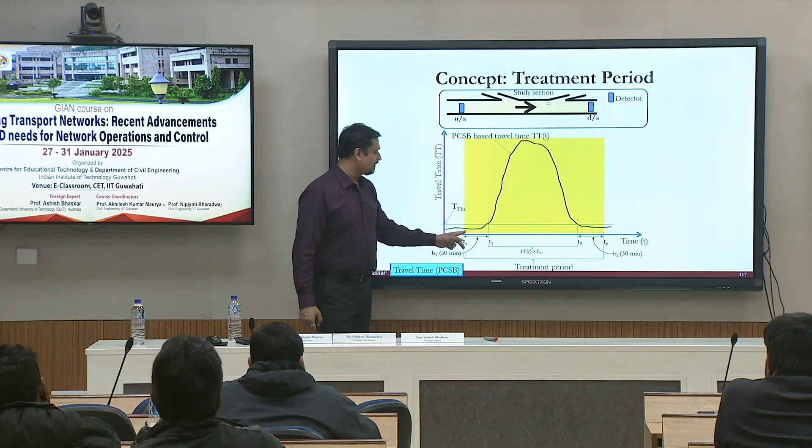The first hook point is maybe half an hour or sometime before the start of congestion. The second hook point is also sometime after, and the peak one. 3 hook points I can easily get. So I draw my cumulative plots as shown here. I say this is the time when I want to make some treatment, because I know this is the time period, this whole time period from here to there, right?

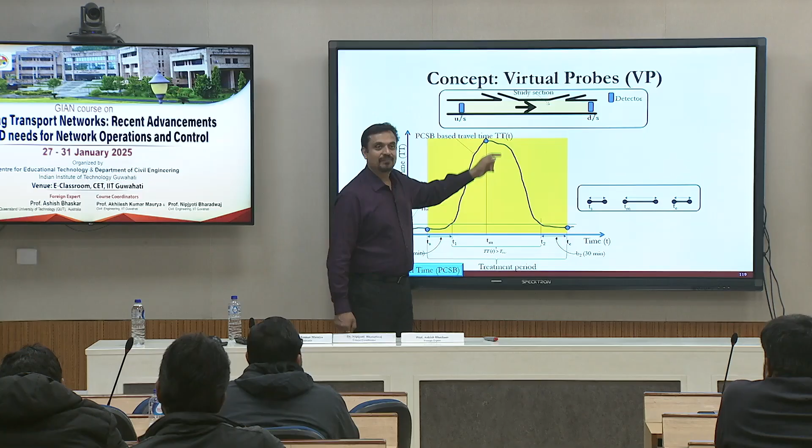I want to do some treatment, and I have 3 hook points, 1, 2 and 3, and I know their travel times at those times, right? At time start with the free flow travel time, time end with the free flow travel time, maybe a time in the middle with the congested travel time. We put those 3 hook points, and then we apply curve fitting, shifting, vertical scaling, shifting to actually generate the plots there, right?

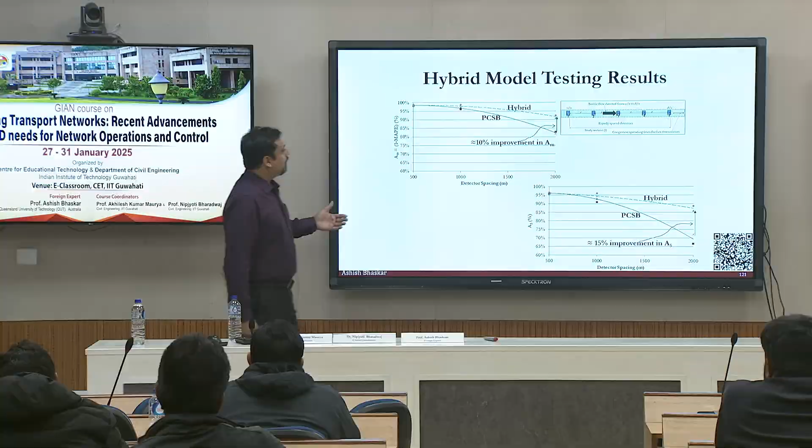Which one do you refer to, hybrid or the Bluetooth? Oh, if I have the Bluetooth, I will go with the Bluetooth. I don't have to worry about the hybrid for travel time. I will have more confidence in the Bluetooth because that is the actual travel time you're observing. But when you do not have the Bluetooth, you have only the loops, you can still make a good estimate. It all depends on the use case or whatever the requirements are.

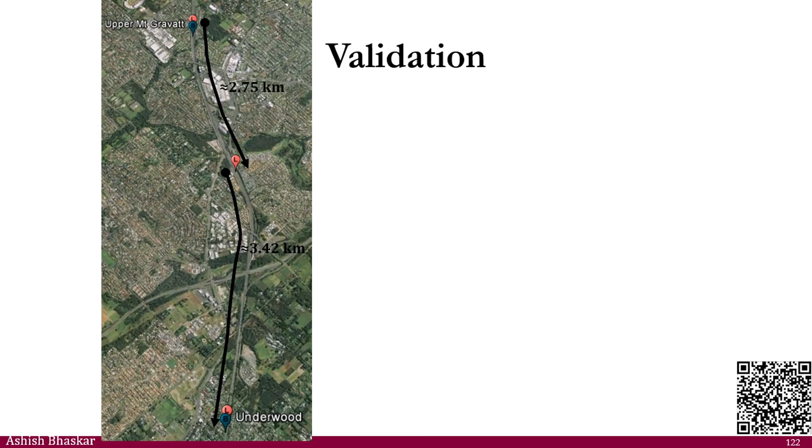They have installed the Bluetooth on the motorways based on whatever logistics they had. On the intersection it was pretty easy: the signal controller box is there, electricity is there, plug it in. On the motorways, you have to look at where you have power, because you want to minimize the cost. You don't want to bring it as a separate one, so there are a number of other logistics. It may not be on all motorway sections. There are a number of sections where you don't have the Bluetooth, and then you are relying on some other source.

Basically, what you are saying is we cannot expect all the facilities at all the locations, so we need to adapt. Yes, that's why you have it. In Brisbane you have it, but you might not have it in other places. You might have only loops; let's say on the Jaipur Expressway, you might have installed some sensors which are maybe 2 or 3 kilometers apart. Then you might apply some other treatments on those estimates to make them better, and you are able to test it on some other network.

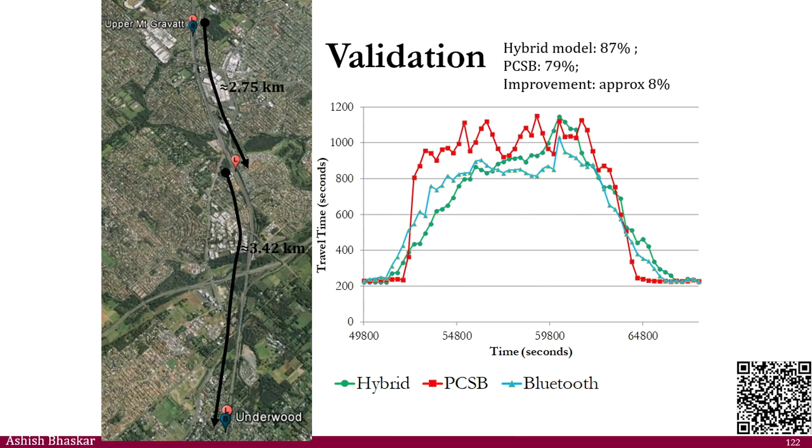This kind of work can help applications at sites where you do not have the data set. Wherever both sensors are available, we validate the techniques and then implement them in other places. Yes, if you have both sensors at this site, that's for validation. Yes.

So maybe we can have a 2 minute break, stretch yourself. It's almost 1 hour before we go to the next one. Any questions from the online audience?